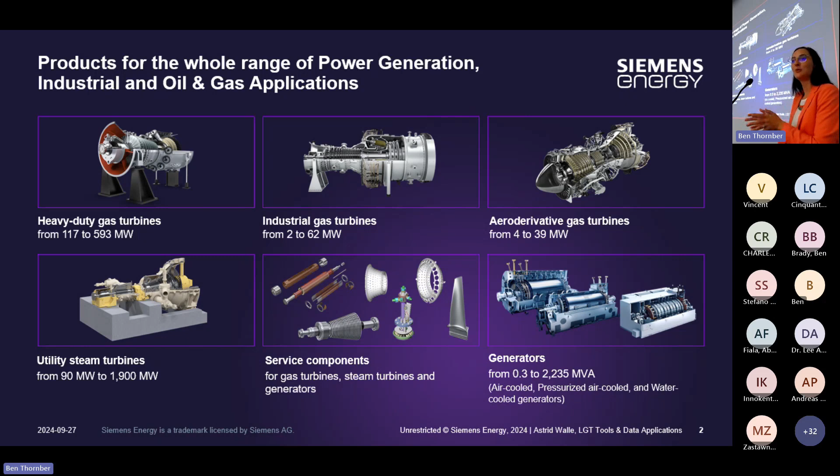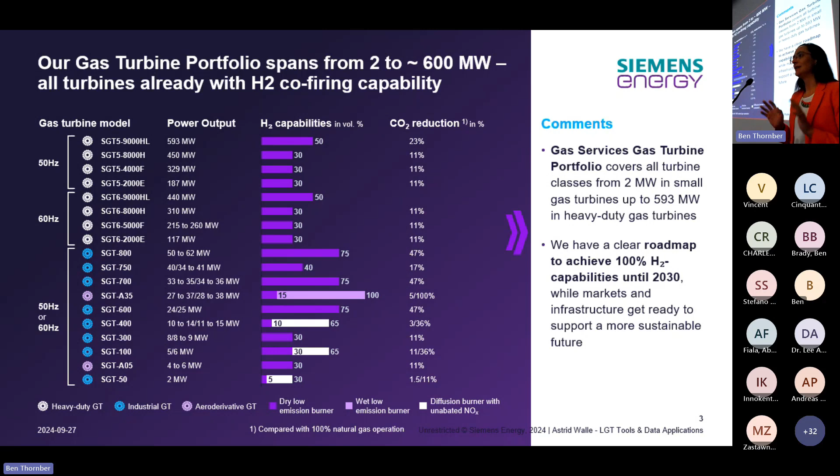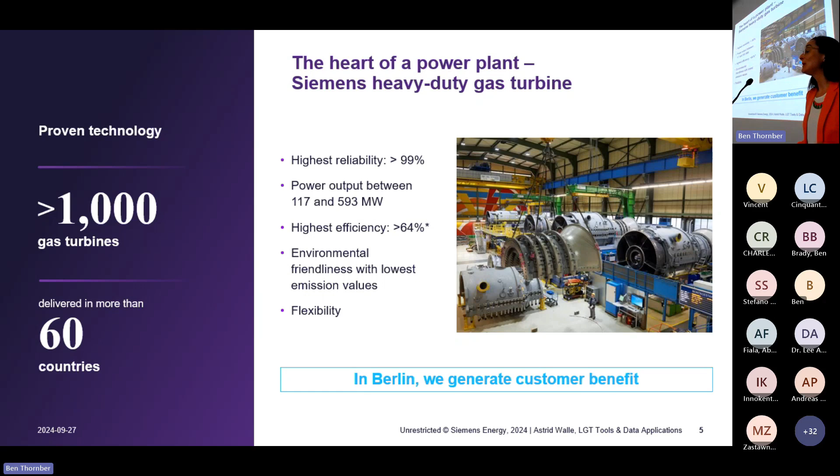We sell solutions for power generation, from a small component to a larger component like the large gas turbine, to the full power plant. I work in the area of large gas turbines, for power generation at large scale, looking at power outputs of around 600 megawatts. Sustainability and H2 burning are also huge topics for us. The headquarters and main facilities are in Berlin, in the city center. I can only recommend, if you are in Berlin, come and visit - it's a beautiful historical site. Gas turbines have been built there for more than 100 years, so it's a very nice place with beautiful machines being assembled.

Coming closer to the topic of AI/ML - we do have a lot of experience when it comes to big data, but mostly with experimental data, sensor data. Most of our units which we sell have sensors installed, so we have great experience handling petabytes of time series data. But when it comes to simulation data, we are not so good there - we have to catch up on our testing colleagues.

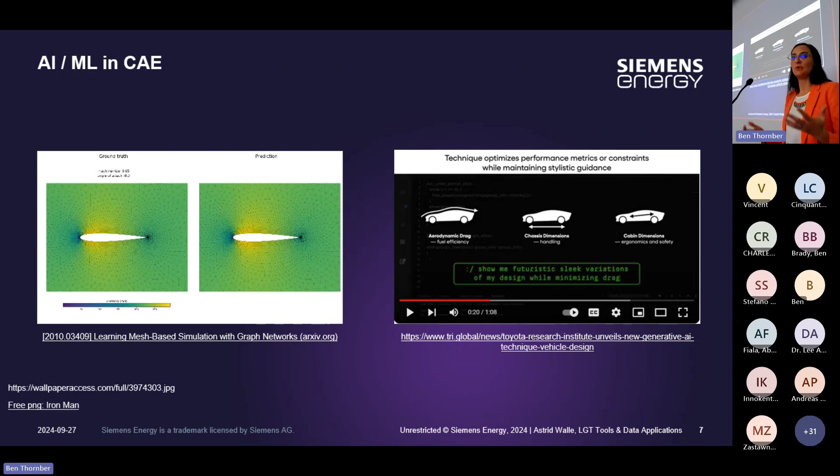What I want to talk about today is what we can do with simulation data. Niels already mentioned that for AI/ML in the whole CAE area there are so many different applications, from generative design to smart initialization. When I personally think about AI/ML and CAE, I immediately think about getting field predictions - we've seen this from the DeepMind paper video, and also from Toyota research, which already has generative design with speech, multimodal models for converting speech to designs.

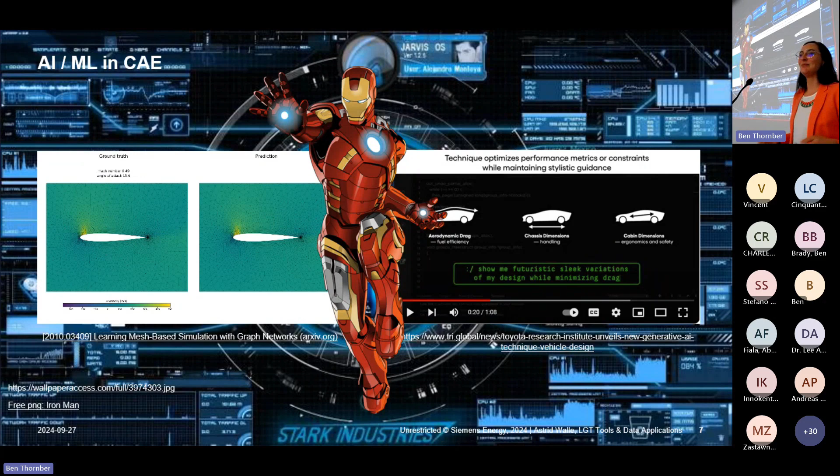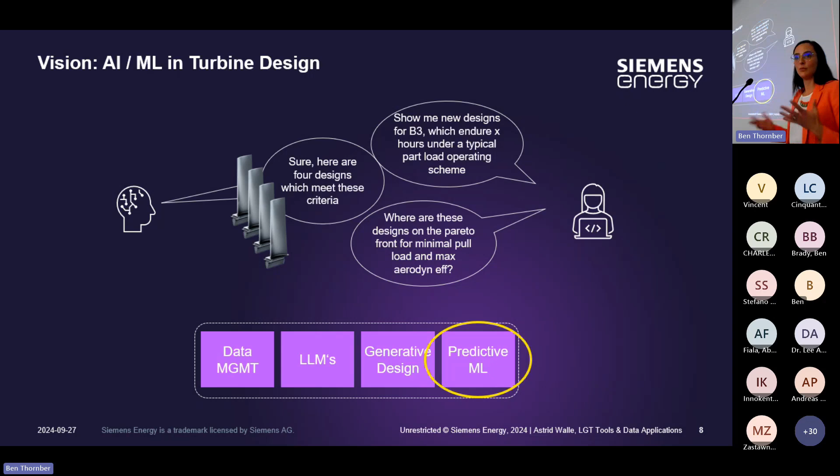At the end, I really want to have my own personal engineering assistant - I will just go to work and say, okay, what do we do today, help me design something. When we think about what this means specifically for turbine design, what do we actually need to get this kind of smart engineering system? We need the data, we need large language models to get the interface, we need generative design, but we also need some kind of predictive ML. That's what we're going to talk about today.

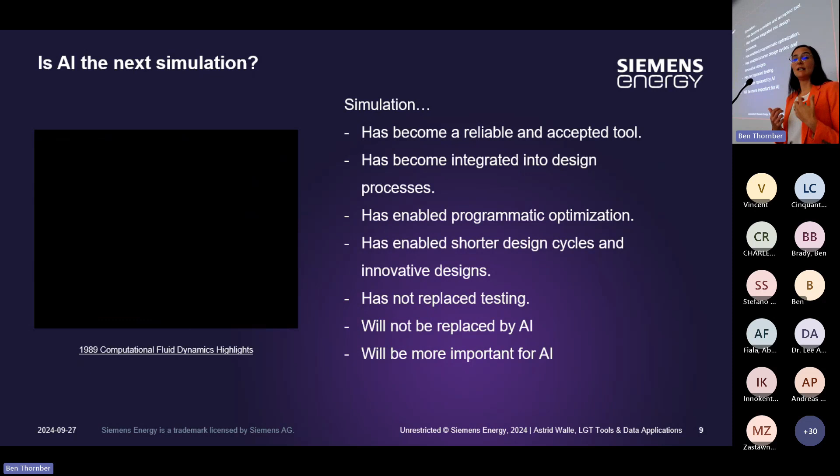We were also talking about this already - the heretic question of whether AI is going to be the next simulation, the next CFD. Is it going to replace it? I really see it more as an analogy between simulation and experiment. So let me tell you this: I really think what we are seeing now with the new AI methods is similar to what we have seen with simulation a few decades ago.

There are a lot of questions around this. There needs to be a lot of experience and trust built, and we need to learn the limitations of these methods. But they will come, and it's about how to prepare for this - it's not about replacement. What we've seen is that simulation still relies a lot on experiments for proper validation, and this is even more true now for the new AI methods, because if we really want to train models at large scale, we need high fidelity simulation results which are reliable. That's a super important topic.

So why am I here today? For us it's a great portion about blade design, because turbines don't change dramatically - it's rather very small changes in the blades which have a small impact on efficiency. But when you look at the power output of 600 megawatts, that small impact on efficiency actually has a huge impact. So we see simulation, and now also AI and surrogate models, as an enabler which gives us the opportunity to make our products even better.

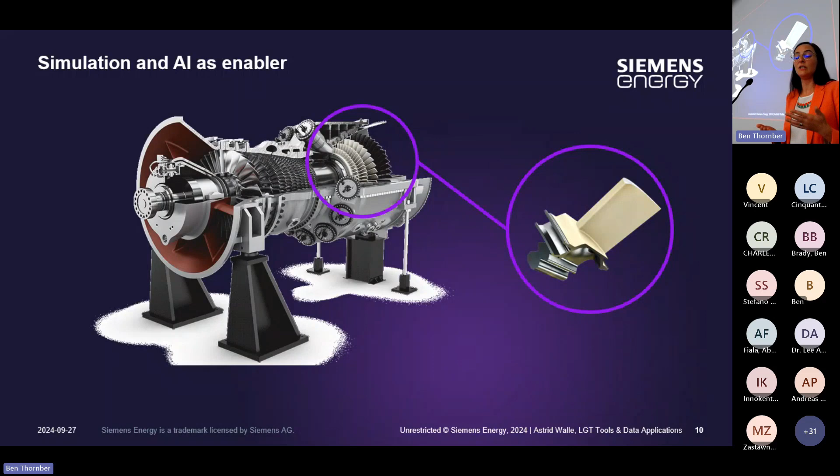We look at different areas of application for this. I think the one thing that's pretty obvious and everyone's interested in is time to market, so making design decisions as early as possible in your design process.

But for us it's also a lot about deviations. How big is the impact of small deviations induced by manufacturing processes? We need to be able to make a decision fast and evaluate this impact based purely on scanned geometry, which is completely different from a typical parametric CAD design you'd usually work with in a CFD process.

And then, of course, we also have the topic of digital twins. That's something everyone hears about, but here we're really interested in predicting the remaining lifetime of our parts depending on the real operating conditions the engine has seen, and where in the engine this part is positioned. These are the main topics, and these are the drivers for why we are looking into surrogate modeling.

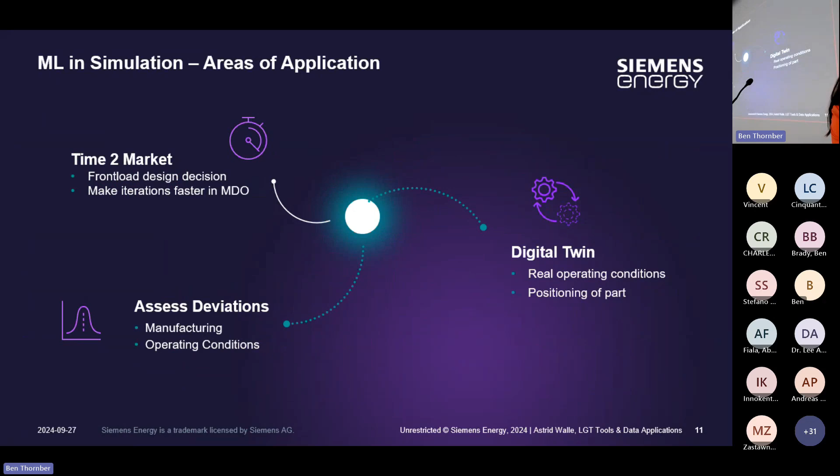The only thing I wanted to say last, and that's probably the same for most companies: surrogate modeling for predicting scalar values, for predicting KPIs, is something we already have very well established. All of our simulation processes are very well automated. So this one we can already check off, and surrogate modeling for scalar predictions is also a check mark.

But now we actually want to go one step further. The motivation for us to do these kinds of studies isn't that we necessarily want to develop and implement our own code for this - we'd rather buy than build it ourselves. But as I said, I think it's super important to do some of these things on your own, just to learn about the limitations, what's possible, and what it actually means to apply this.

So we tested different models which you can find in the literature - all of these come from papers. We looked at MeshGraphNet, the same paper Neil referenced. Then we looked at PointNet, which was initially more meant for object classification and segmentation. We also looked at PointNet++, the next iteration of PointNet, which is supposed to be good at looking at multi-scale things. And then we also looked at U-Net with a voxel representation of the geometry.

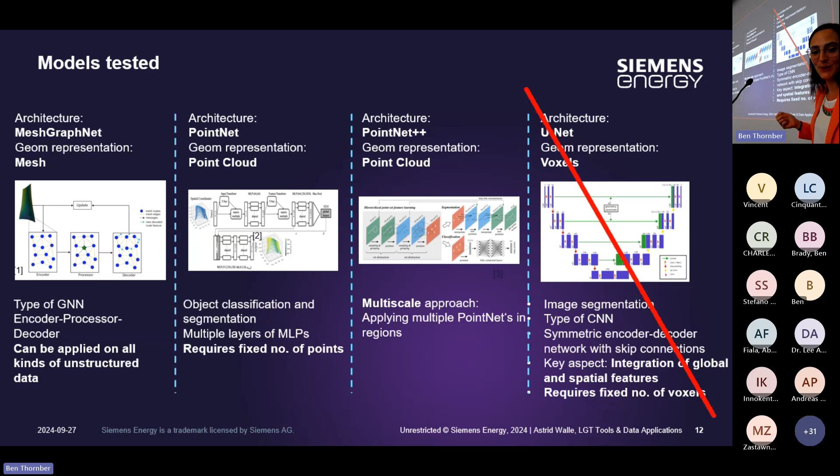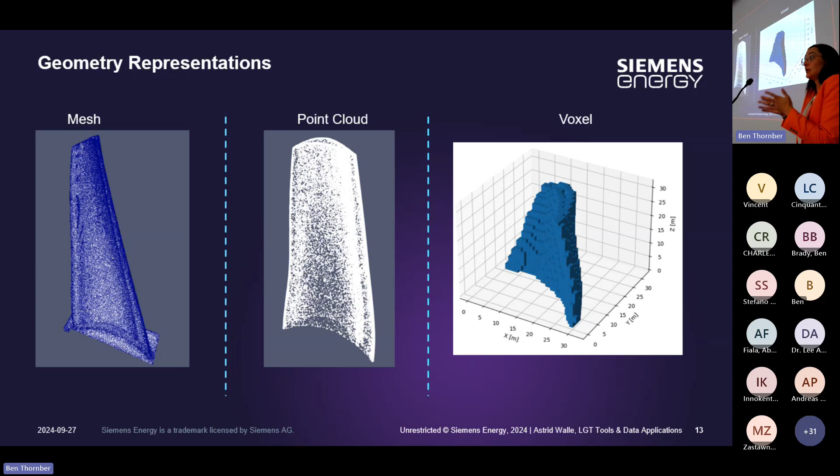That was our first finding: this one isn't really applicable. That's the first learning I'll share with you now. When we look at the different geometry representations, we have the mesh, we have the point cloud, and this is what a voxelized geometry looks like. It's super coarse, and you're already asking yourself how you'd be able to really represent things, especially since we're looking at small geometry changes in the blade.

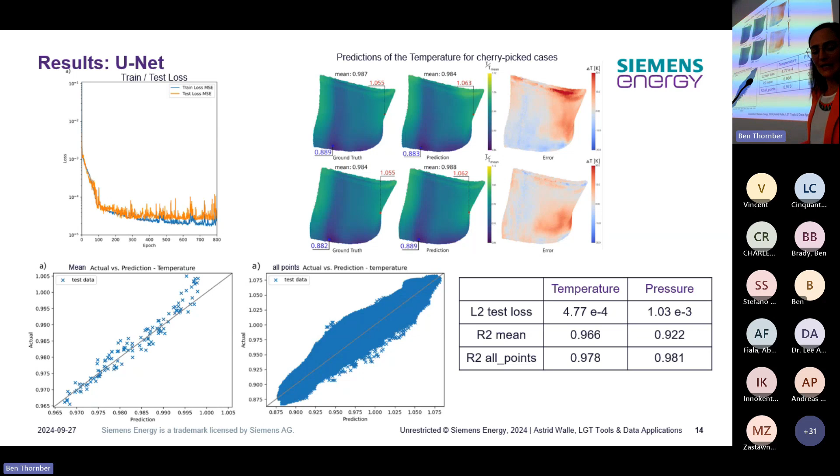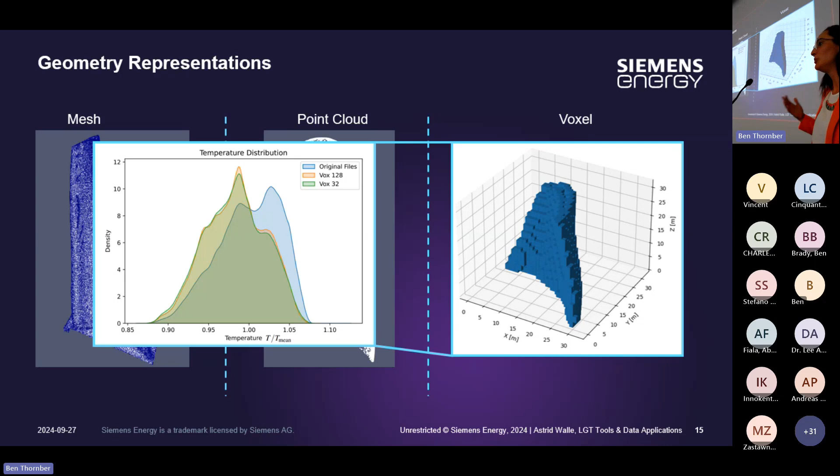But if you think about it and look closer at your data and how it's actually represented, you see that just by doing this pre-processing of your data and geometry, you're already changing the values and fields so much. That's a change you won't see in the typical machine learning KPIs, because when you compare predicted to actual, it only takes into account the already processed data. But this change you introduced beforehand isn't represented in the typical KPIs. So it's important to be aware of what you've done to your data even before you started training - you might need to take this into account.

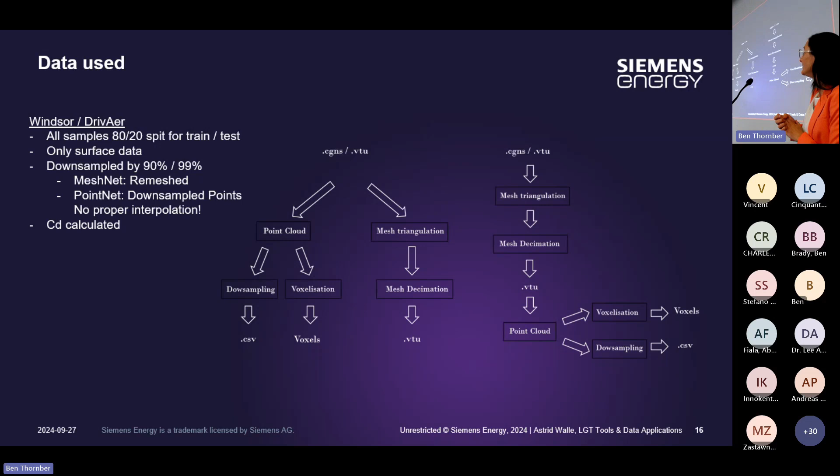Okay, then coming to the Windsor and the DrivAer datasets and what we have trained and what data we have used. So for both of these datasets, we did an 80-20 split for train and test. We were looking only at the surface fields. So we did not take volumetric data, but we also didn't do, as Neil was introducing, the direct KPI prediction. So we were just taking into account the surface fields and then deriving the KPIs such as the drag from the fields. We actually did a high downsampling to fit this onto the hardware we have.

So for the MeshNet approach, we did a remeshing, and for the PointNet, we actually just did a downsampling of the points. And that's also something we found out during the process, and something I want to share with you, because this downsampling, you can do it in multiple ways. And there are maybe better ways and not so good ways to do this.

So, for example, what we did initially for the point cloud was just a pure downsampling of the points, which does not include a proper interpolation of the values. So there's no surface averaging included. So basically, we introduced an additional error into our data even before we started with the training. So here again, it's just important to be aware of this. What you do to your data, even before you bring it to the model, is important.

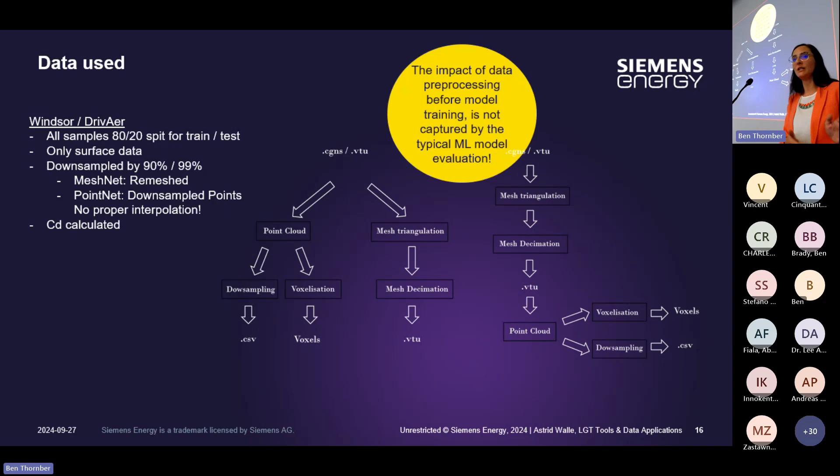Then when we talk about the required resources, I think it's also important to be aware of everything that comes with it. So it's the data pre-processing you need to do to prepare your data for training, but then you cannot forget that every time you want to run a prediction, you have to apply the same kind of pre-processing to the data for which you actually want to get a prediction. So these are requirements for your computer environment, and it might not necessarily all be available on the same system where you usually run your simulations.

Then for the model training, as I said, for the MeshGraphNet, with a 90% downsampling, even this was running for 6 hours on 4 NVIDIA A10s. I don't know exactly about the cost, and I'd rather not look it up because probably my colleagues will hate me for this, because we do have some budget, let's just say it like this.

Then for the PointNet and the PointNet++, we did an even harder downsampling, because with this we were able to fit it onto some on-prem machines. But it's just important to have this in mind. And of course, keep in mind that the software which we built is not professional software. So most probably there are ways to make it more efficient so that bigger problems fit into less GPU RAM, but still there are limitations and you need to make sure that you have access to the right resources for the problems you actually want to solve.

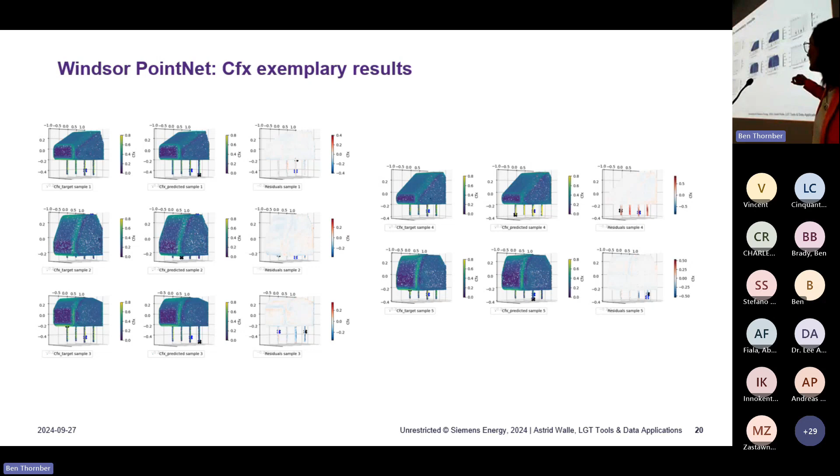So now, I hope you can recognize at least something. It's all scaled and normalized, of course. So you can always see ground truth versus predicted, and then the error of the prediction. And you can see there are quite some errors, especially when we look at Cfx.

So these results were not really nice. That's actually also the point when we decided to go further with the PointNet++. So here we can see some of these losses for the PointNet++. And here it's even more obvious. There are just some points which are very, very far off. And that's also something we can see in the CP.

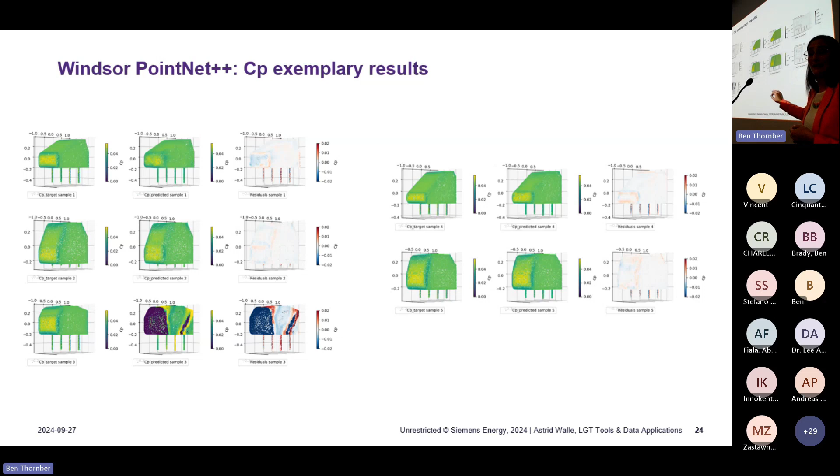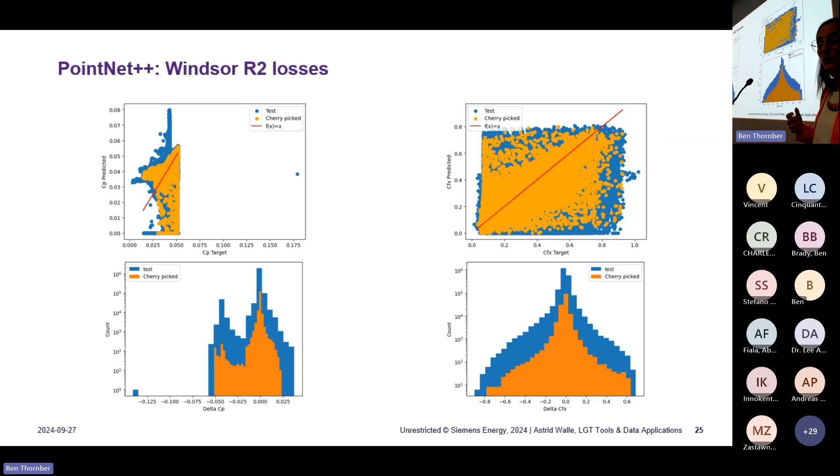And I do also agree with Burka that looking at these kind of colorful plots does not really tell you something really trustworthy about the results, but it will give you an idea if something is really wrong, like in this case. And this, for example, made us look a bit deeper into the training data set itself, have a proper look at the distributions of the values, and do a more proper job in outlier removal.

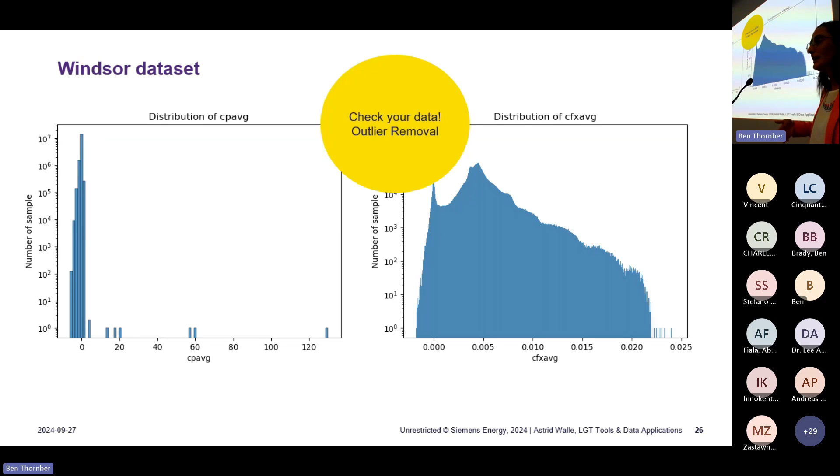So what we actually look at, for example, is over all of the data sets, for all of the cells of the surface, the CP value. And what we can see is that there are some strange values, which most likely, besides the large changes in geometry, make it an even harder job to do these predictions. So that's definitely something: you really need to do a proper data exploration and filtering, cleaning of your data before you even get started.

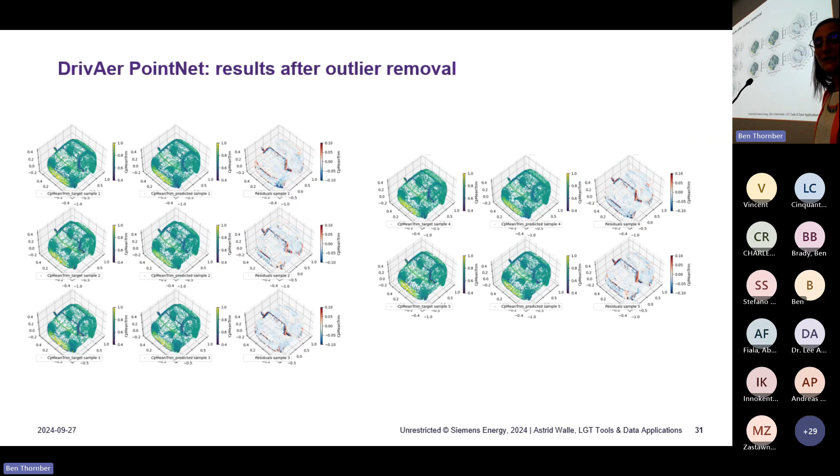But then again, also here we did some data cleaning, we removed some outliers, and then suddenly everything looks a lot better. The same clean data set we also used with the PointNet++, and this looked even better. And the last thing I want to share is, when we put this into the same kind of plot, with the integrated force over our predicted surface, we lie within the range of other CFD results. Whereas again, keep in mind that our ground truth is actually not the experiment.

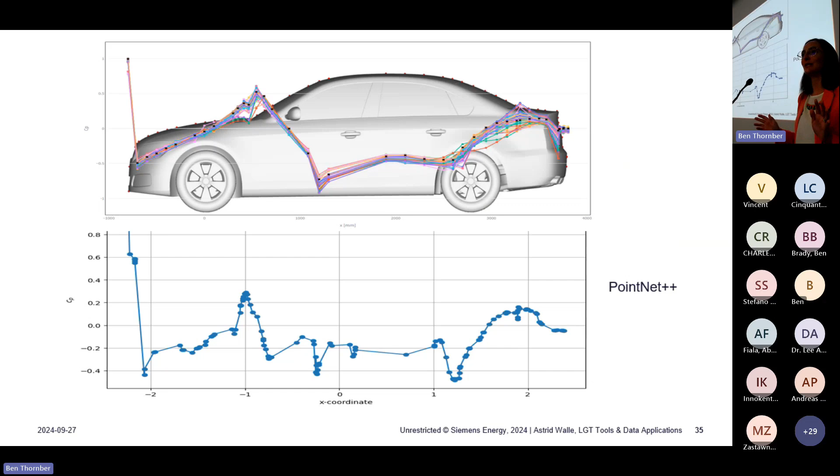With this, I want to close and say, at least this should be a motivation for all the proper software companies to participate next time and show us that this can actually be done much better. Then I wanted to also share some results from the MeshGraphNet, which I think was the most promising, but I kind of ran out of time and students.

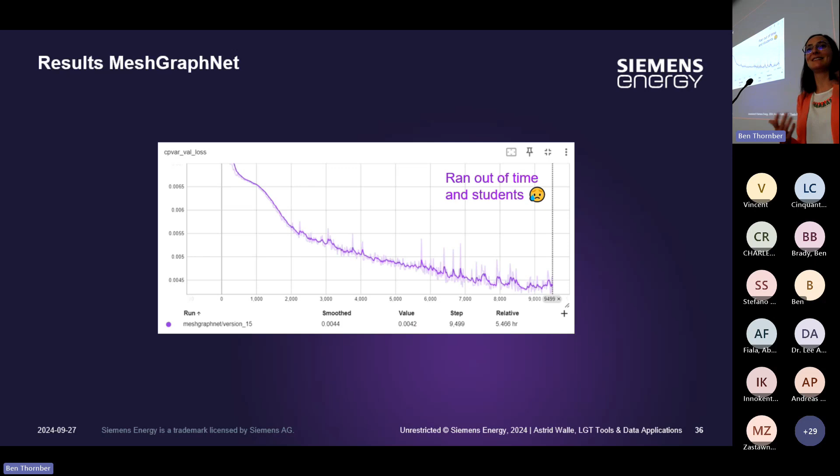Then look at the data processing, think about what change you already introduce there. The typical machine learning KPIs do not take into account this data processing. And then the question, what metrics do you really want to look at to evaluate the quality of your results? It's probably not contour plots, but rather some line plots, which will really show you some characteristics of the flow.

Also bear in mind the data uncertainty, as we have talked about a lot already. And I think it's also super important later on, when you have your model and you run predictions, to have some kind of confidence indicator, which will tell you: am I still interpolating? Am I still in a valid range with what I'm now asking the model to do? And I think that's it.